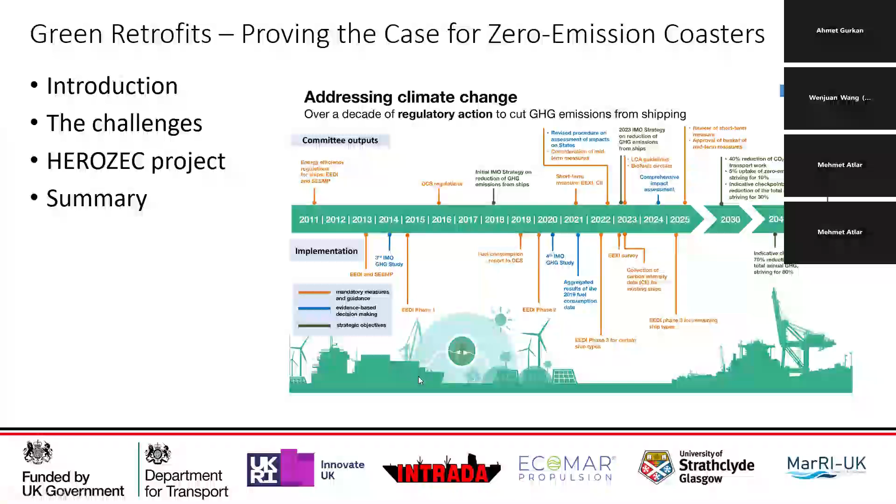So a brief introduction: the HEROZEC project, which we'll be talking about, is there to address a few challenges. This is a project that was conducted under CMDC4 as part of the UK government's UK Shore programme. The project was funded about a year ago by the UK government in order to try and address the challenges, which I'm going to talk about in the next couple of slides. The project is run as a consortium between ourselves, which is Intrada Ships Management, EcoMar Propulsion, the University of Strathclyde, and MarRI-UK.

So the challenges we're trying to address here, the main one is the moving regulatory environment. In the European Short Sea, which is where this is targeted, it's a particular domain of shipping which is actually one of the underappreciated parts of the global commercial shipping fleet. The European Short Sea and the Short Sea in general represents around 10,000 vessels, a hugely populous part of the market, albeit one that seems to be at the lower end in terms of where technology appears, and certainly where general public appreciation of the marketplace is. For context, the total commercial international fleet is around 100,000 vessels, about 106,000 vessels, so you can see that 10,000 vessels represent something like 10% of the entire commercial fleet.

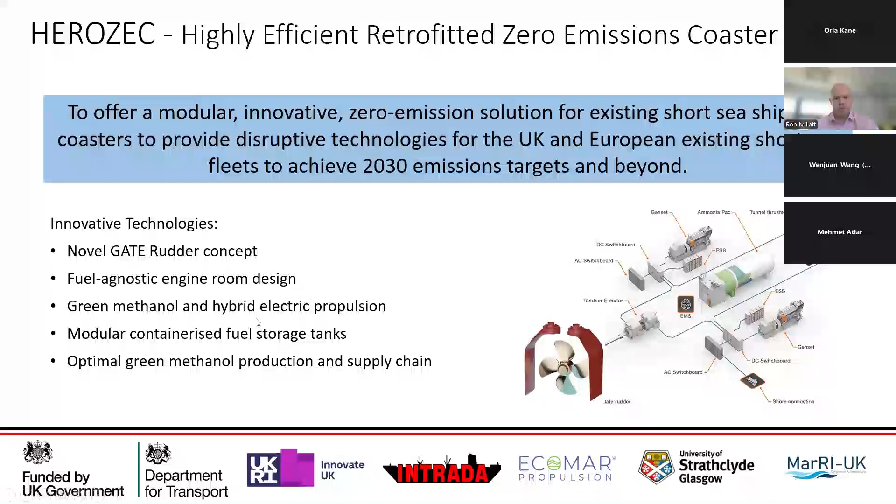On the next slide, you'll see some information about the HEROZEC project, which has got 5 key tenets that can largely be broken down into 2. Eugene from EcoMar Propulsion will be talking about the powertrain element of the project - the powertrain supply chain for the fuel and the fuel storage. He'll introduce himself, followed by Ahmet from the University of Strathclyde, who will talk about the novel gate rudder system and how that fits within the hull efficiency improvements to create a combined package - a potential retrofit package for vessels that an owner could adopt if they wanted to.

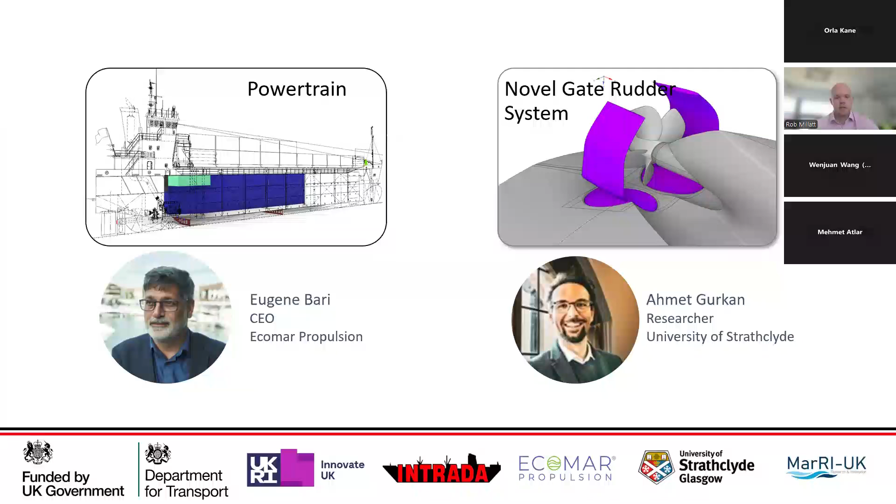So Eugene, are you happy to take over the next slide now, please?

Thanks, Rob. I hope everybody can hear me. I'm actually in a car park at the Ocean Terminal because I'm on a panel in 10 minutes, so unfortunately I have to be a bit quicker than I would have liked to be. But if anybody has any questions specifically for me, please feel free to email me on the email you see on the screen there. So I will speed through these - I know everybody's busy and we've all got stuff to do.

So obviously we'll start with the vessel itself. The principle we were looking at was how we were going to use 2 different kinds of potential fuel at the beginning of the project, and then we wanted to whittle that down so that we had one functional fuel that would meet the duty cycles, do everything that the owners wanted - in which case it's Intrada Ships - and also minimize the cargo losses. So can we go to the next slide, please?

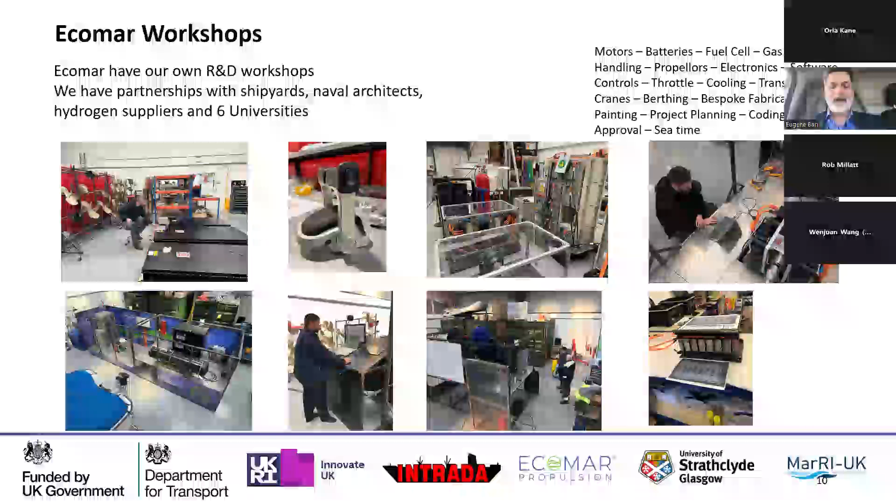As you can probably tell from this, I've done a lot of preparation that I'm not going to be able to use, but we've also done an awful lot of practical delivery of machinery, including battery, hydrogen, and methanol technologies. So next slide, please. So we're not just about designing on paper, we're actually about making these things happen.

Next slide, please, Wenjuan. Again, the statement of value for the entire industry is huge, and it's increasing. I'm sure most of you saw yesterday's projection with the changes to zero emission and lower emission propulsion. So that really feeds into this whole HEROZEC project.

So next slide, please. Yeah, so we looked at the whole project, and we were looking at, first of all, we took hydrogen as a potential, and we took methanol, and pretty soon discounted hydrogen. The energy density isn't appropriate for this kind of vessel, and therefore we ended up with methanol. We didn't investigate ammonia at this stage because the technology is by no means as advanced as it is for the other technologies, and the further you go along that hydrogen combination, it gets more and more complicated and more expensive. So we whittled it down to saying this is going to be a methanol powered ship.

We have the existing motors in there, and then we looked at the conditions of whether it was viable to put an entirely new powertrain in, or whether we should retrofit and modify the existing powertrain. And it came to a conclusion that we had to modify the existing powertrain because the costs of retrofitting such a huge machine was prohibitive.

The second part of it was to then look at the blend, how much methanol against fuel oil that we're going to put in there, and its efficiencies and all these sorts of things, and how it would fit in again with the regulatory environment and also the structure of the ship. And I think the physical structure of the ship is one of the key leading aspects to what we were looking at a later stage.

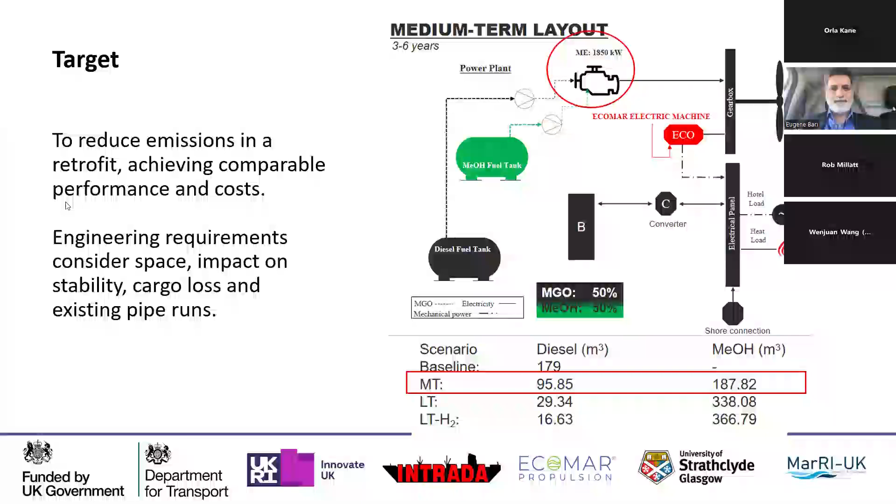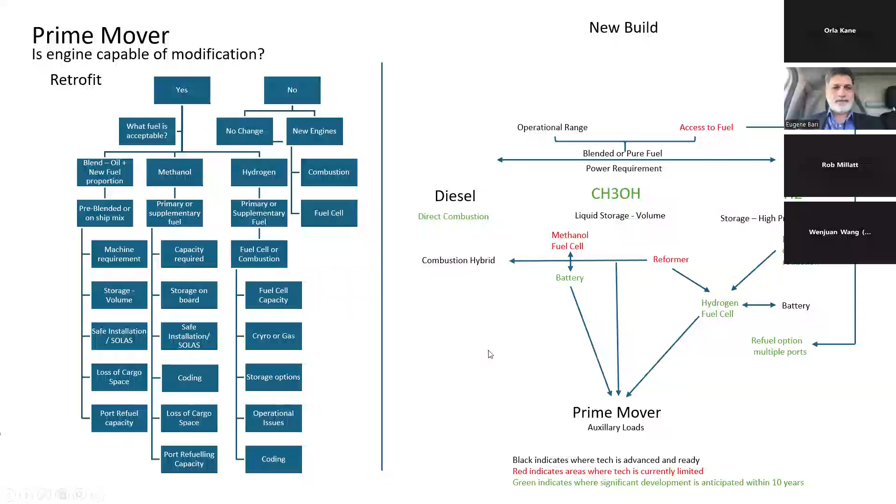We then also looked at, and I should stress, the engine itself. Can you change the engine itself? Can that be modified? In this case, it was the Caterpillar engine, so it was possible. And then we need to look at balance of plant and existing equipment, and then the ship itself. And this is the interesting bit for the naval architects, is how do you get that fuel on board that vessel, given the fact that it takes up more space than your existing fuels.

And so we spent a lot of time investigating not only the regulations that we were looking at, which is IGF code and Lloyd's, but also about how we would change the ship over without it impacting stability, buoyancy, cargo, crew effectiveness, and all these multiple different aspects. And so the game that we played was a very complicated game of Tetris, in effect. And we played with a lot of different aspects, the sloshing aspects of the different fuels, and also cofferdams, where we would place those, whether we should put things on the deck, under the deck, and all these different variables. And we worked our way through it. So if we could go to the next slide, please.

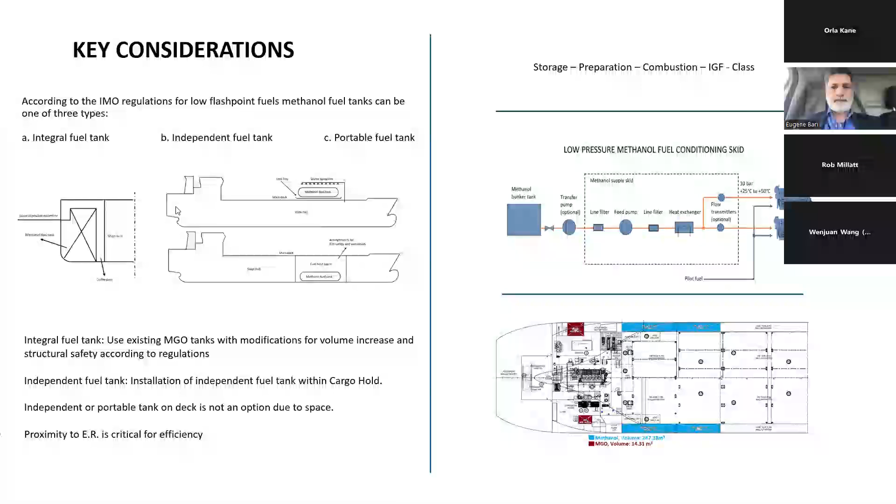So these are the key considerations. We now had a state where we know how much fuel we needed, the volume that needed to be put on board the vessel. We also determined what the fuel preparation areas were going to be. And with a gap analysis against Lloyd's Register, we were aware of where the pipelines needed to be, the vents, and so on and so forth.

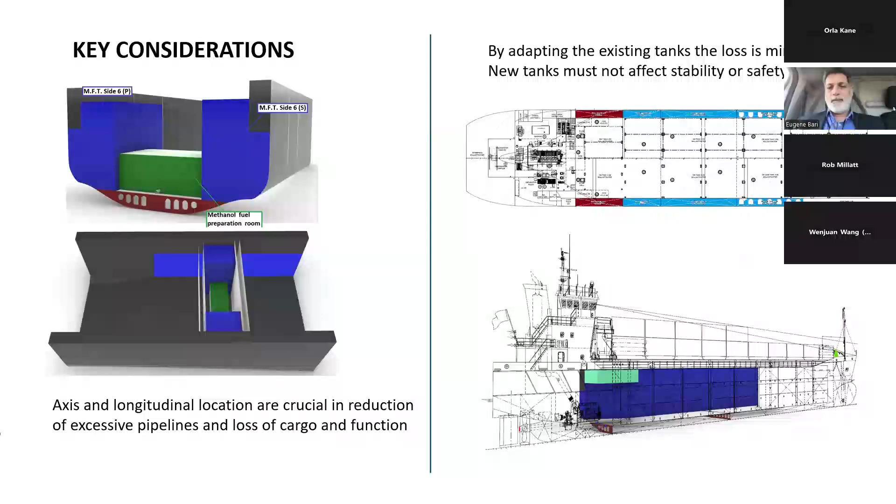And we experimented, as you'll see from these slides that we've flicked through now. There were quite a considerable number of aspects to look at, not only in terms of materials, but in terms of how we were actually physically going to place that in the vessel.

And we came to a conclusion that we could manage the vessel by changing the hatches, welding down one hatch, and placing a nitrogen inertion tank on the top of that hatch, which met all the requirements and only removed 8% of the cargo. So we lost 8% of the cargo as the ship is currently, which was within the boundaries that we've been set.

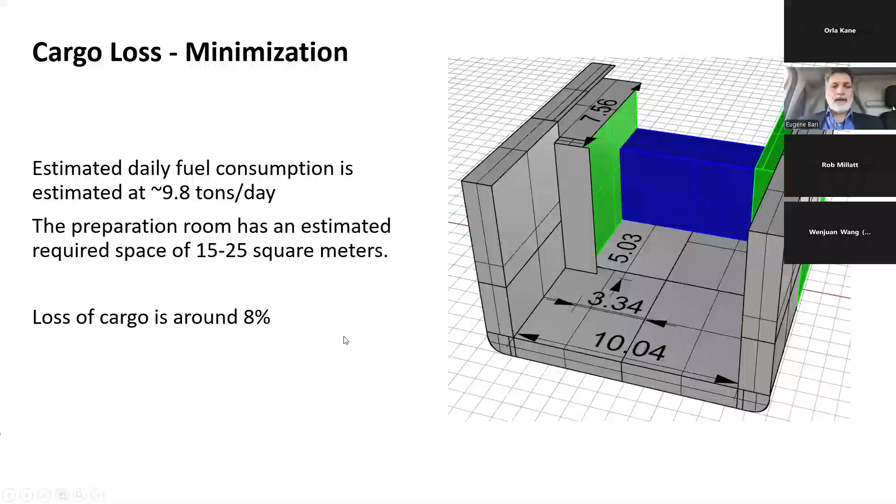So the effect of that is that the cost was minimised and the long-term value was maximised.

So these, again, I will just skip through these a little bit, but these are further safety considerations. So you have to look at IGF codes, you have to look at bunkering, you have to look at how the excess gas or waste is vented and where the pipe runs are going to go.

And this is all based on the existing ship, de-aeration, and so on and so forth. And so what we did was we determined where these optimal choices were, and then took that as the next stage to make our other core decisions, which is an iterative design process that we worked all the way through.

And at every stage, we referred back to the Lloyd's Register IGF code, and we also referred back to the principal who really wanted to know, which in this case was Rob, what is it going to do for my ship?

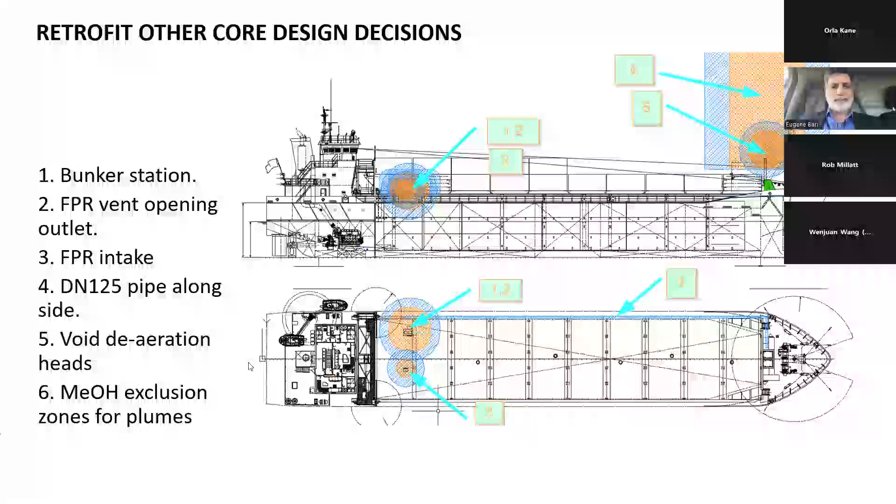So the strategies that we came up with, as I say, we moved the deck hatch, we sealed 50% of the hatch. We mounted a nitrogen tank on, which then creates an inert gas, which will enable us to meet all the safety requirements for the tanks as they deplete. It also allows us to purge those tanks as we go.

And we looked at the orientation of the tanks and their positioning. And what we found was on the vessel, in this case, it had a false bulkhead that we could use. So we moved a lot of these smaller issues around.

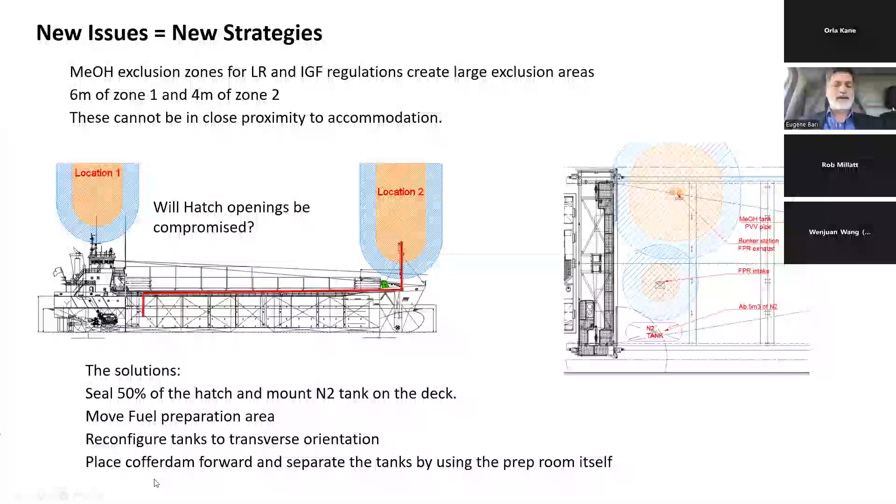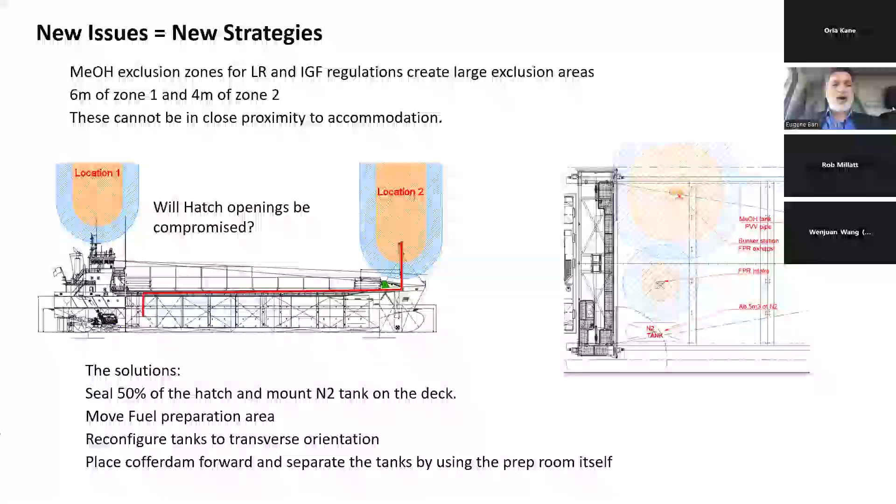And we actually found that the vent location for the mast, there is a possibility to use the existing trunking and run it right along the ship and get it right away. So location 2 ended up being the preferred option. And given the fact that it wasn't under high pressure, that it wasn't any particularly onerous engineering, we considered that to be a much safer option than going anywhere near the wheelhouse.

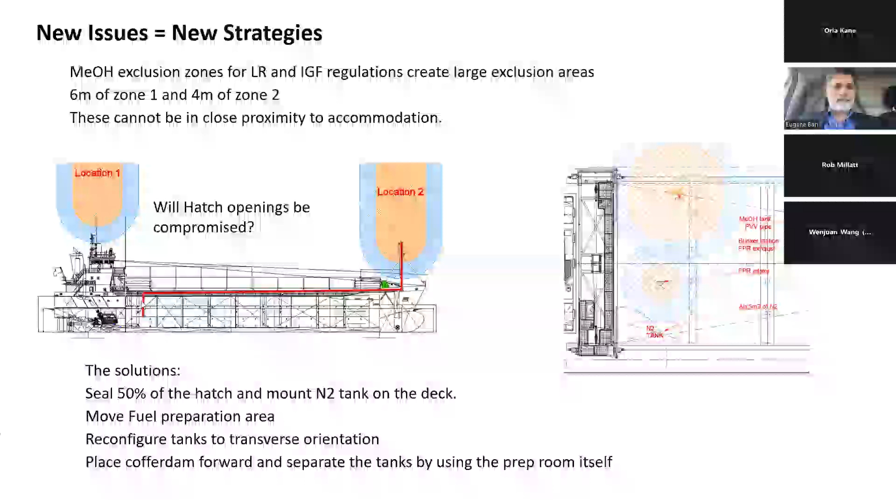And this is our final design. So having gone through multiple iterations, what we found is that by utilising the rules and positioning the fuel preparation room

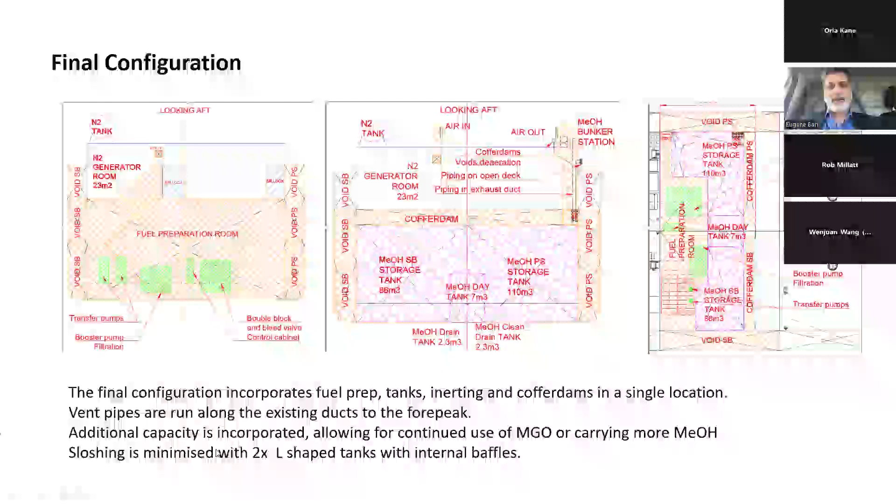and the cofferdams and creating new transverse tanks, which you can see are in an L configuration, we were able to provide the fuel that was required, the storage capacity. We're able to inert that tank, we're able to meet all the IGF codes, and we're also able to maintain the stability of the ship without any adverse impacts.

There will be a new ballast calculation to be done, but actually the stability of the ship's not impacted whatsoever.

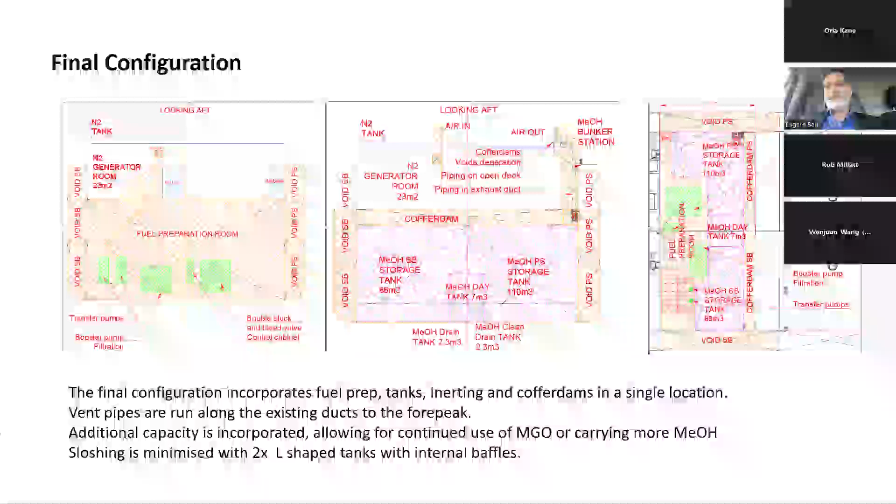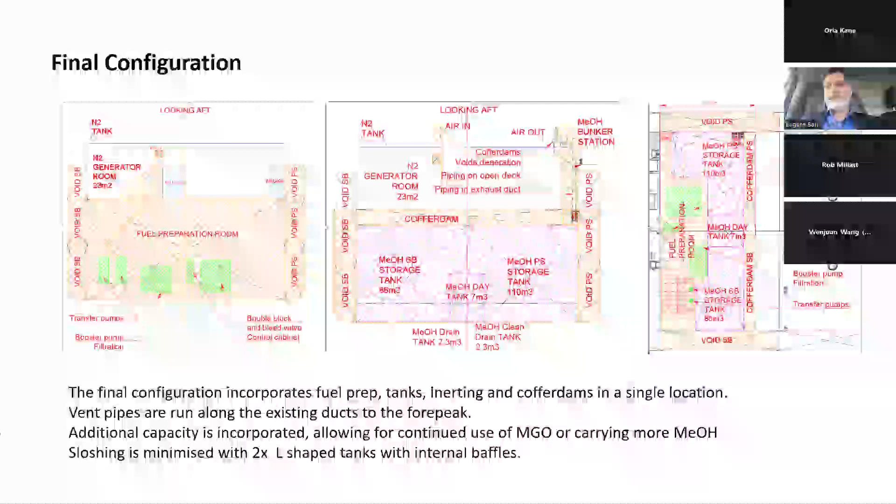So by the time we get to the final configuration, which you see in front of you, it's very, very simply put together, and it has no direct impact on the existing engine room or steering room.

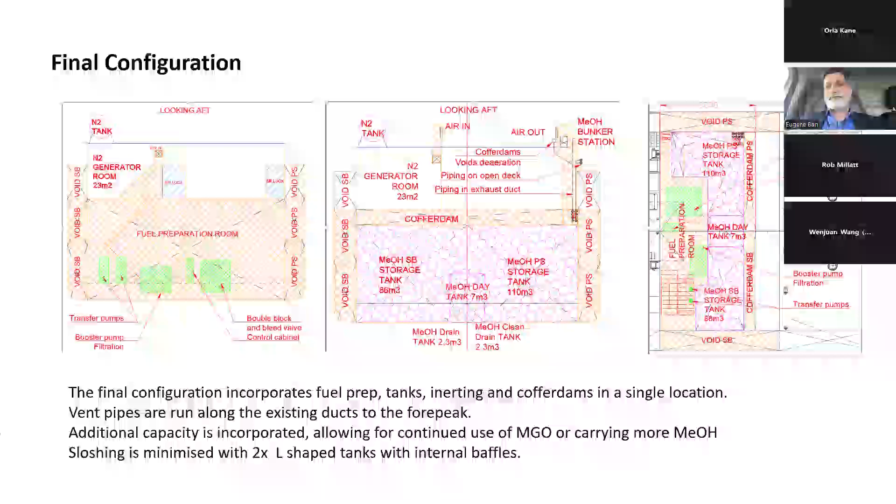Next slide, please. It took us a long time to work these things out. At the transition from existing fuels, the financial side of things, the cost centers we considered as in effect a contract for an Intradaship, we were looking at all these different engine modifications, fuel handling systems, safety systems. These things have to be brought into the design process, and the earlier you bring them in, the better.

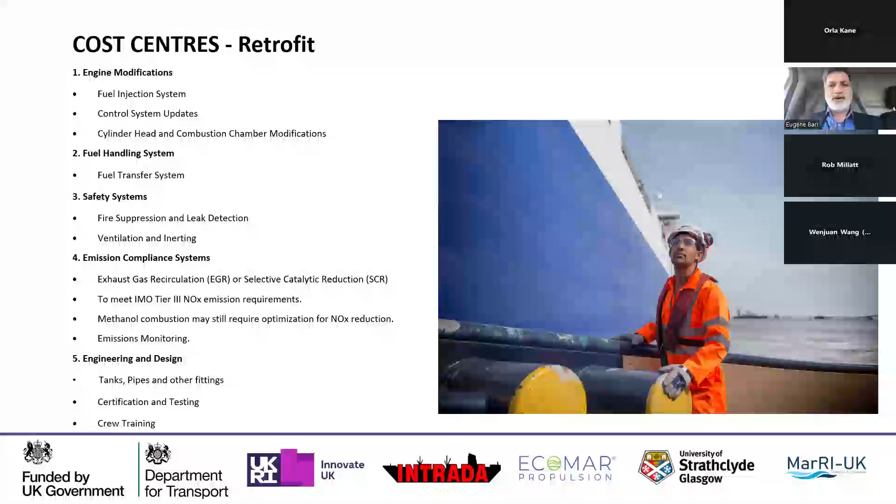I think one of the major issues we discovered was that the Caterpillar engine is proprietary technology. That was one main issue we found very difficult to overcome. If you go to those OEMs and get other shipowners in the future as part of a development project, the supply chain is there. They're working on the fuel supply, and the fuel supply is limited at the moment, but in the short term it will improve.

Sorry, don't know whether it's just me or everyone. So Eugene, we cannot... I think we may be having an issue. Okay, sorry, it's okay, some words we heard. I hope that people will be able to gather the information from some keywords. I don't know if you can hear me at all now, guys. Yeah, now it's okay, are you back on? Sorry, apologies for that everybody, my voice is going and now my internet's going as well.

If we can go to the next slide, I'll sum up very, very quickly. Just to reiterate what I was saying before, the fuel supply is available. It is growing. Methanol is becoming more available. Short to medium term, this is a viable option.

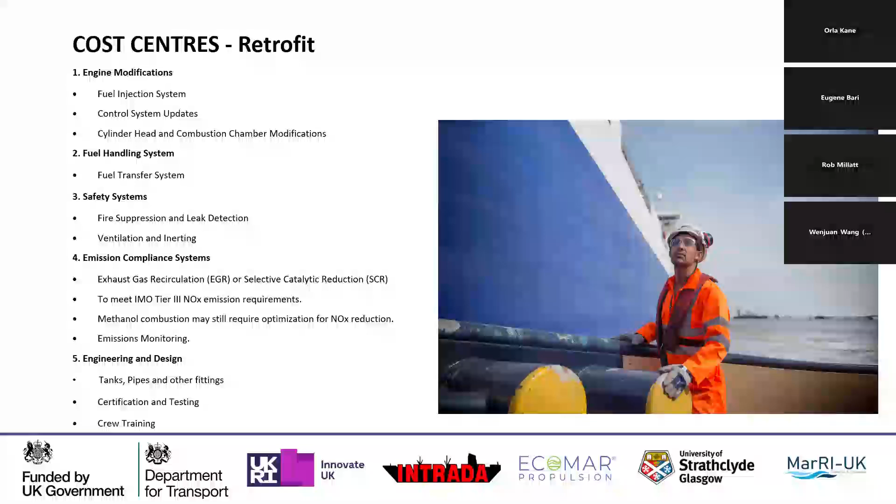So on the next slide, you'll see the costing. Even given the restrictions from Caterpillar, what we've found is that the energy supply and the motor transition is around about 2 to 2.5 million euros. There is finance available now for those of you who are interested in doing this stuff, which reduces the capex massively and transfers it to opex. It is a very viable, possible solution.

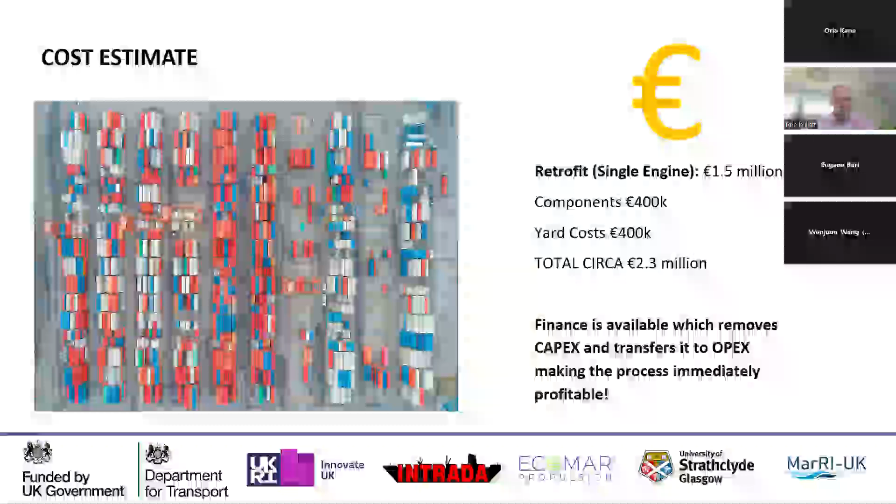And so the risk that Rob was talking about is reducing. I wouldn't say it's minimized, but it's definitely reducing. For us, what we found was the project has been really valuable in not only collating all the regulatory environment, but also the economic and financial stability for our clients, in this case the Intradaship. At that point, I will hand over to Rob and leave you. Thank you, and I apologize in advance for the early termination, but these things happen.

Yeah, thank you very much Eugene, appreciate that. What we'll do, we'll move on to the next slide where Ahmet's going to talk about the gate rudder system and that side of the project. I understand there's a bit of information there, and at the end I'll talk a little about financials and how those numbers are grounded - the 2.3 million euros, the breakdown of those costs, how that fits within the financial risk, how that compares to a new build essentially. So Ahmet, if you're happy to introduce yourself, please take it away.

Hello everybody, can you see my screen right now? Yes, we can see that fine. Good, yeah, good morning everybody. I'm Ahmet Gurkan, a computational fluid dynamics specialist and researcher at the University of Strathclyde.

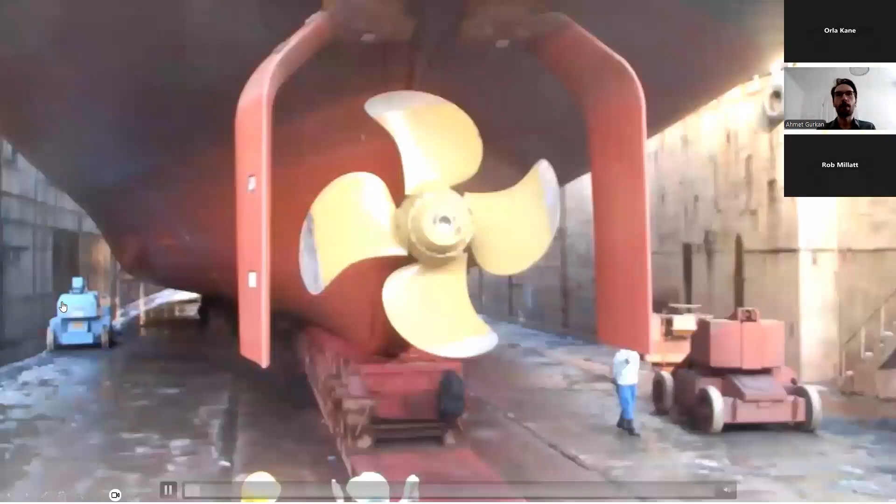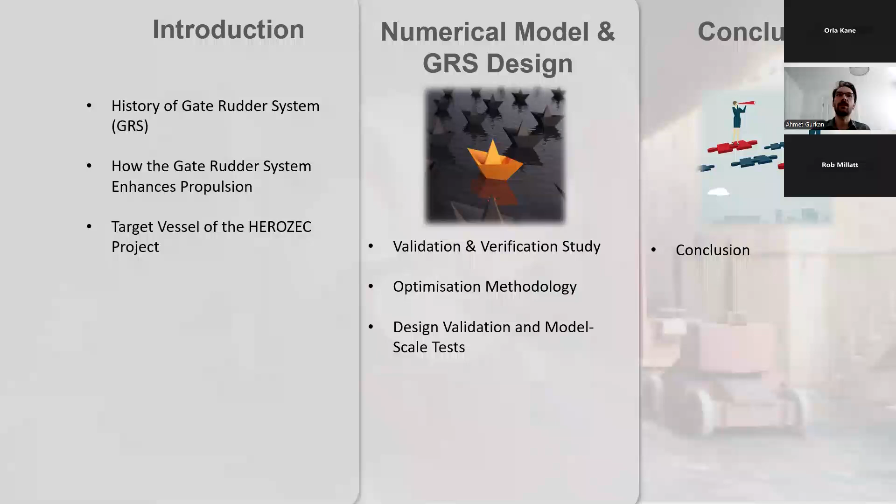Today I will be presenting the design of a gate rudder for a 90-meter container vessel and its impact on powering performance, explored within the HEROZEC project at the University of Strathclyde. I will begin with a brief background on gate rudder technology, including its history and the fundamental principle behind how it enhances propulsion performance. Then I will introduce our target ship, Scott Explorer. For the gate rudder design, we applied an established optimization method utilizing computational fluid dynamics. I will share an overview of the fundamentals along with the validation and verification study, then explain our optimization methodology followed by key results from the design validation, calculation, and model scale test predictions.

The earliest version of the gate rudder system was invented by Mr. Sadatomo Kuribayashi, and it was originally called the frame rudder.

The concept was later tested and refined through a research and development project at the National Maritime Research Institute of Japan, led by Dr. Noriyuki Sasaki. His key innovation was repositioning two rudder blades on either side of the propeller, controlled by a single rudder stock, a design that led to the first associated patent.

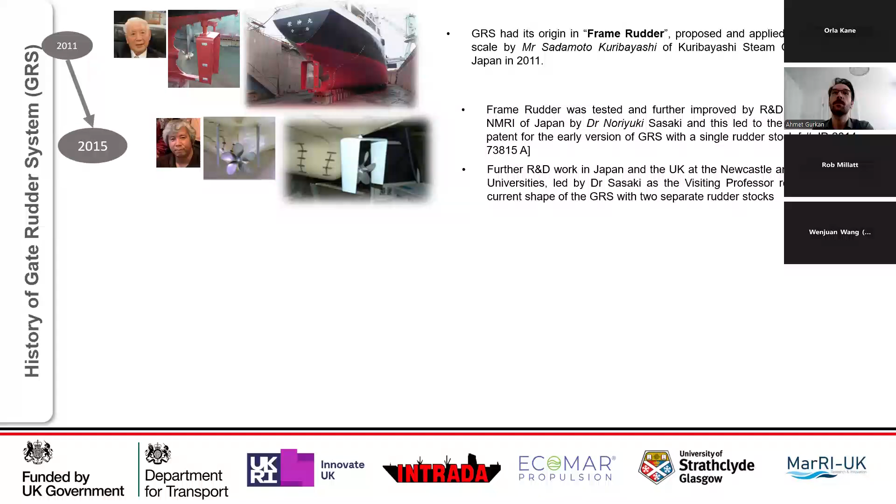Further research and development efforts, contributed by Newcastle University and University of Strathclyde, evolved the system into its modern form, featuring two separate rudder stocks.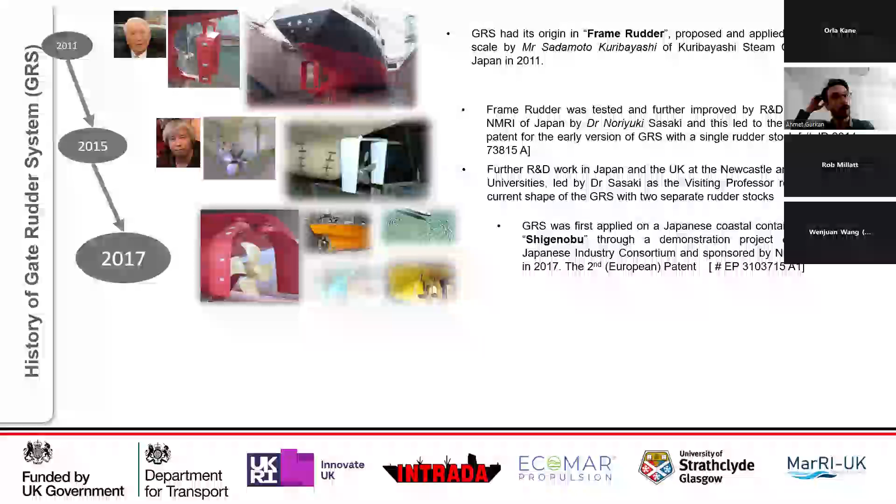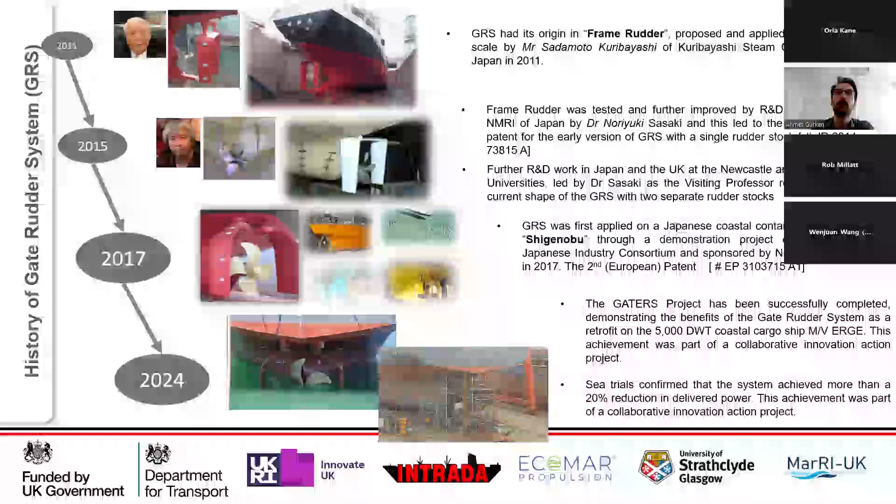Between 2021 and 2024, the Horizon 2020 GATERS project, led by University of Strathclyde in collaboration with 18 companies across 7 countries, aimed to demonstrate the benefit of the gate rudder system as a retrofit on the 5,000 deadweight ton coastal cargo vessel MV Erge.

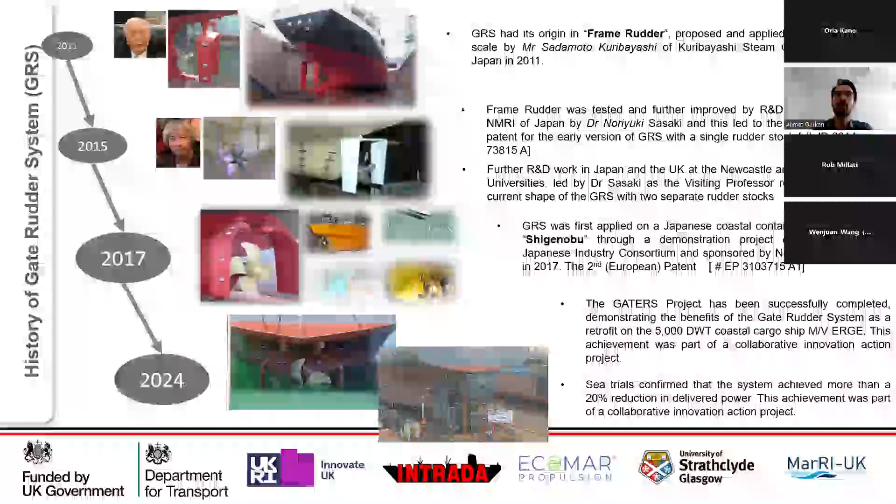Sea trials and voyage data confirm that the gate rudder system achieved more than a 20% reduction in delivered power, highlighting its efficiency and potential in real-world application.

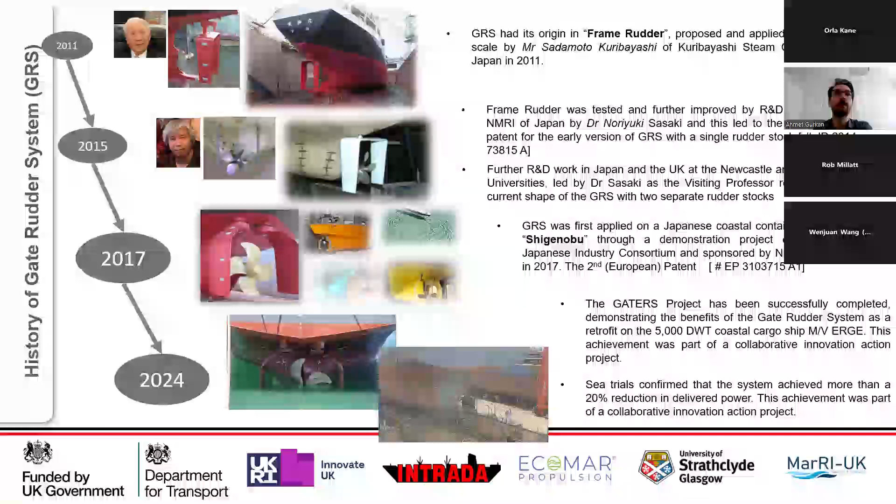In this slide, I will explain the fundamental principle behind how the gate rudder system improves propulsion efficiency. For a conventional rudder system, a moving ship and its rudder experience resistance due to their motion through the water. When the propeller operates at the stern, it interacts with both hull and rudder, causing additional resistance due to accelerated flow of water. This phenomenon, known as thrust deduction, typically accounts for 15 to 25% of hull resistance, and in some cases even more.

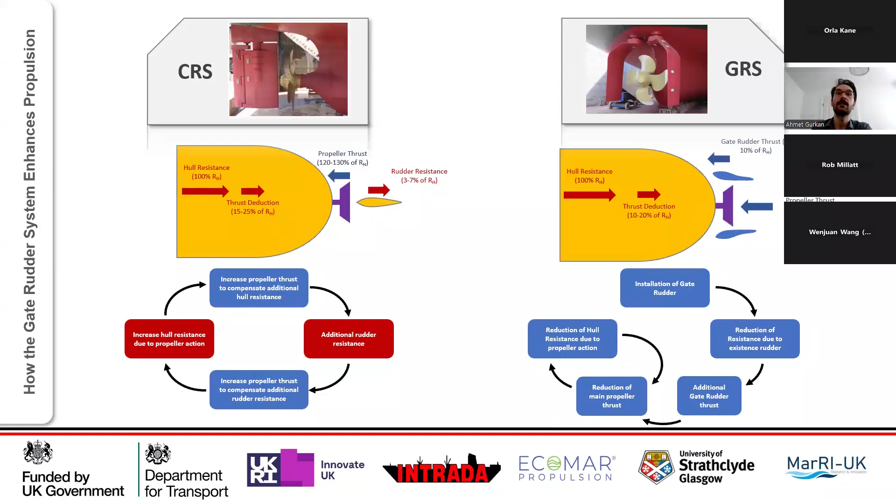For the gate rudder system, unlike conventional rudder, the gate rudder is positioned on either side of the propeller, rather than directly behind it. This relocation reduces total resistance caused by the rudder. Additionally, the gate rudder generates a positive thrust force, meaning it contributes to total thrust force, including the propeller.

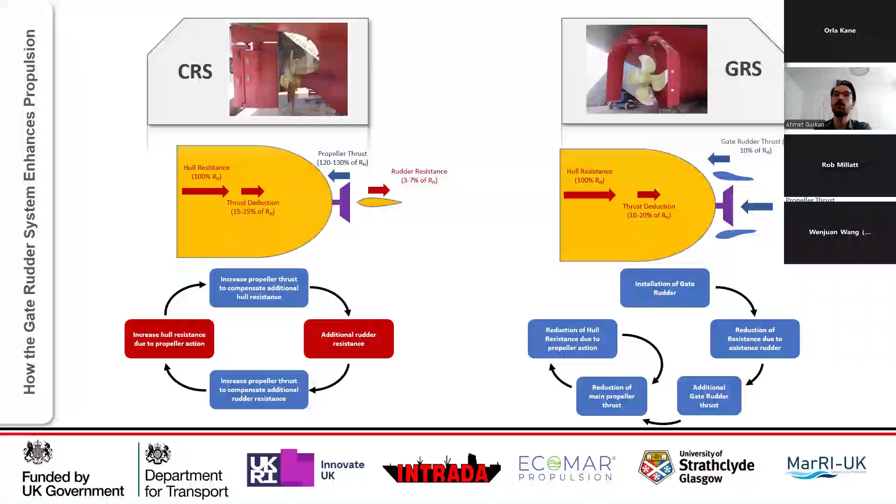Furthermore, rudder blades create a high pressure zone, which interacts with the hull, producing an additional force. We call it pressure recovery force. As a result, the propeller requires less thrust, leading to less water acceleration and reducing the level of propeller-hull interaction. This combination of reduced resistance, added thrust, and improved pressure recovery is what makes the gate rudder system significantly more efficient than the conventional rudder system.

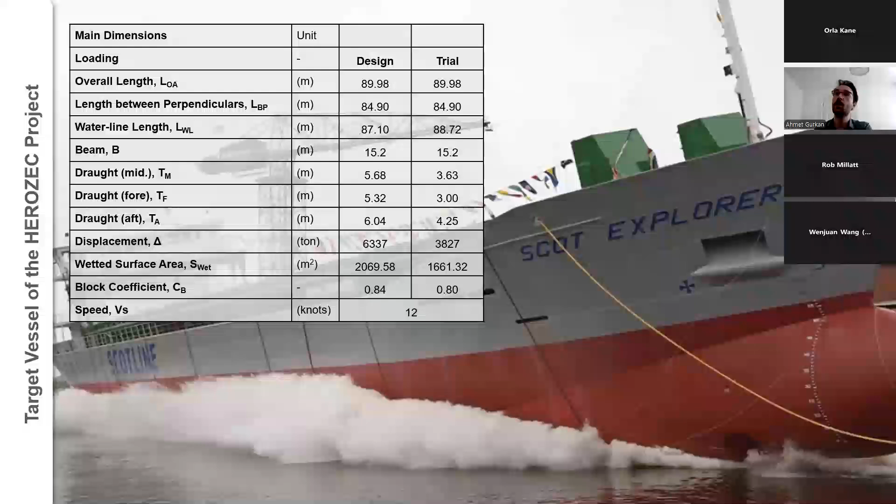Our target vessel is Scot Explorer, a 90-meter long container ship capable of reaching speeds up to 13 knots. In this design study, our primary focus was on the design condition, where the vessel operates at 12 knots with a mean draft of 5.68 meters. However, we also considered trial load condition as part of the project. The Scot Explorer is equipped with a ducted propeller system featuring a 2.3 meter diameter propeller.

For the gate rudder design and power prediction, we utilized computational fluid dynamics. In this slide, here are key aspects of our numerical model.

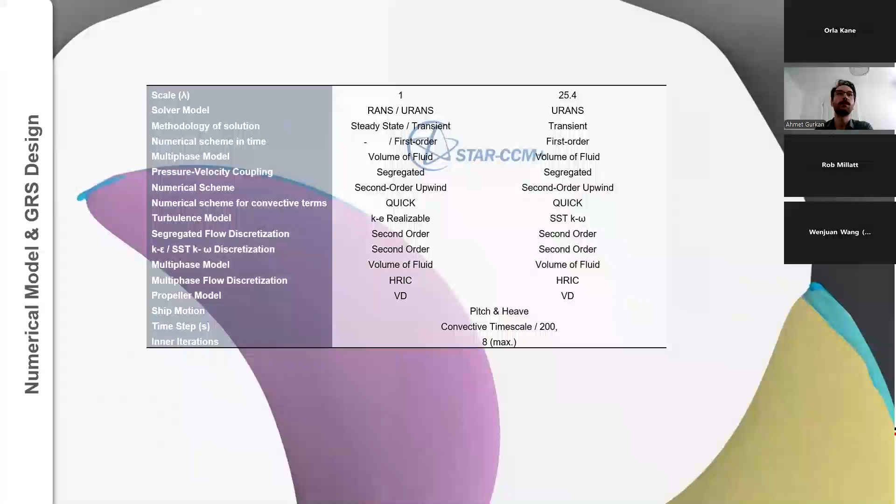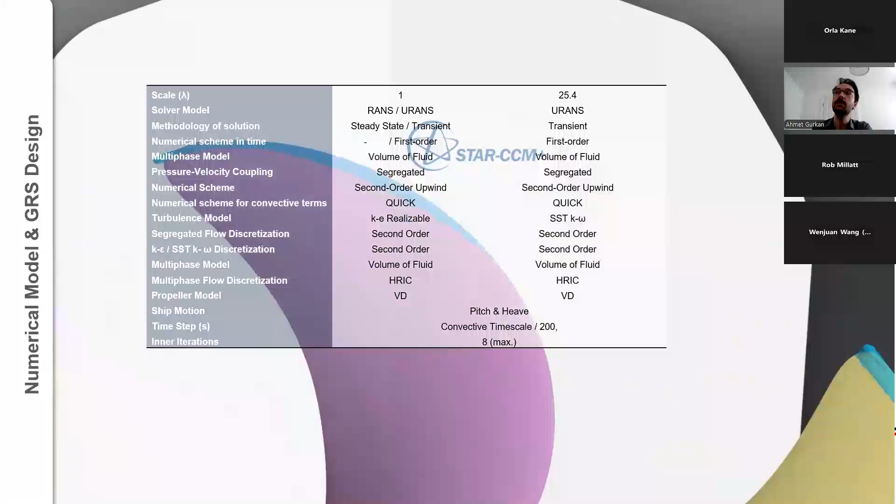We used Star-CCM, a viscous-based CFD solver. Resistance and propulsion calculations were conducted using unsteady Reynolds model for both model scale and full scale simulations. Open water calculations and optimization were performed using steady-state Reynolds model. The volume of fluid model was applied to account for free surface interaction.

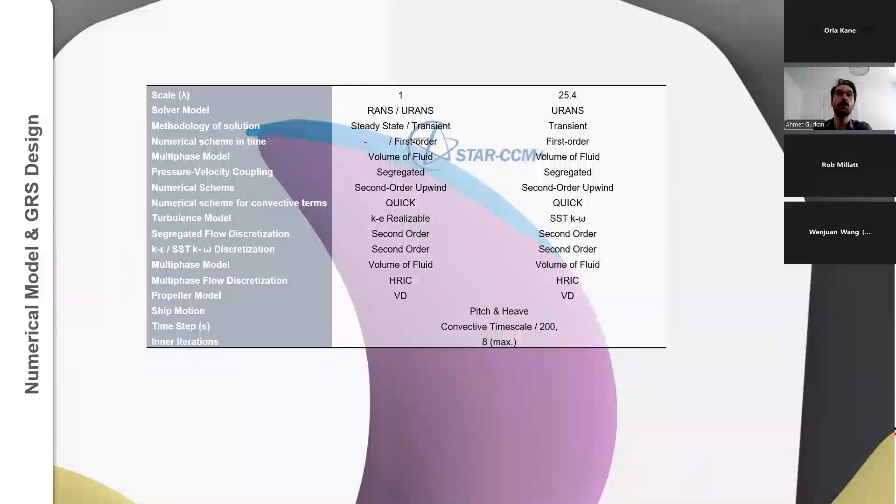Pressure and velocity coupling were solved using a segregated approach. Depending on the simulation scale, we used K-epsilon realizable and SST K-omega turbulence models. All numerical discretizations were implemented using high order schemes for accuracy. Ship motion was considered in 2 degrees of freedom.

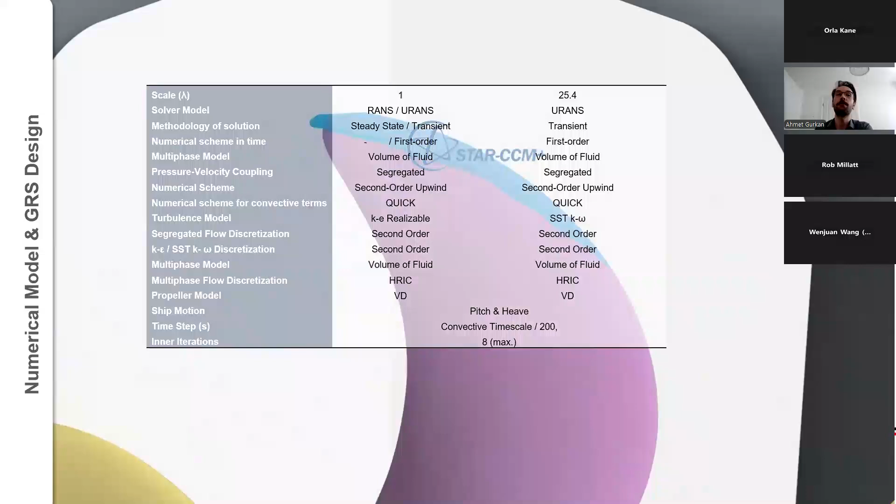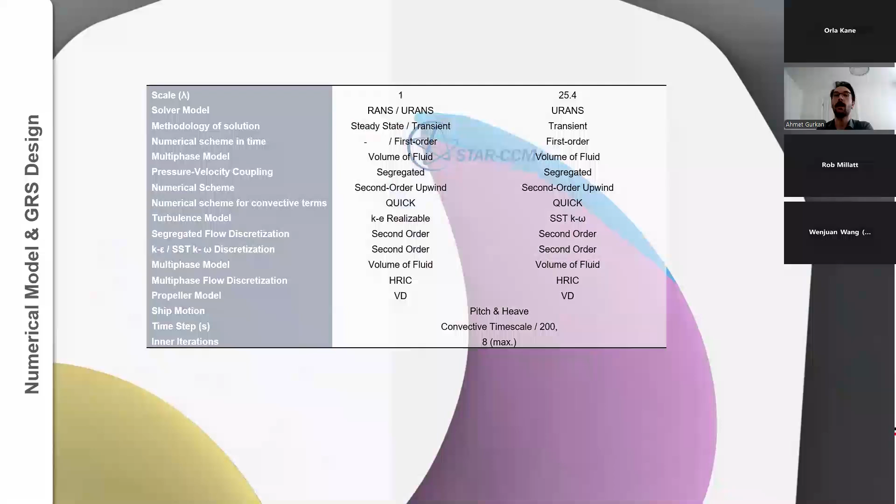These are heave and pitch motions. Finally, propulsion calculations were performed using a modified virtual disk approach due to project workload and time constraints. This setup allows us to achieve reliable and efficient CFD prediction for the project.

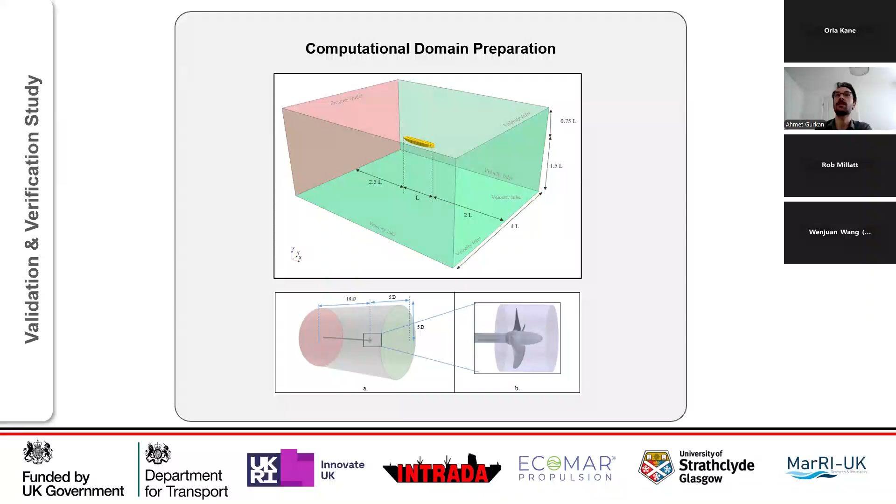Mesh generation, or in other words, geometrical discretization, involves dividing the computational domain into small cells to create a solution matrix. For this study, we used Star-CCM's trimmer mesh method. To ensure accurate flow resolution, we applied local refinement in high gradient flow regions, like around the hull, appendages, and the propeller, especially for the open water calculations.

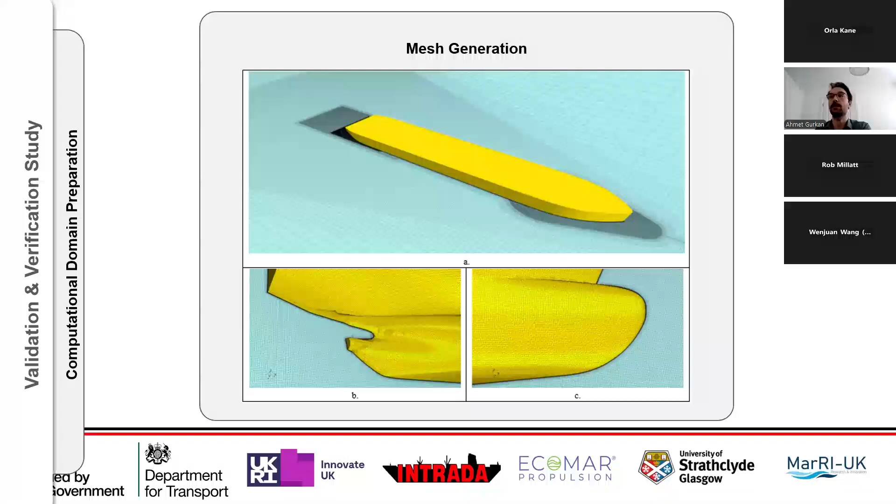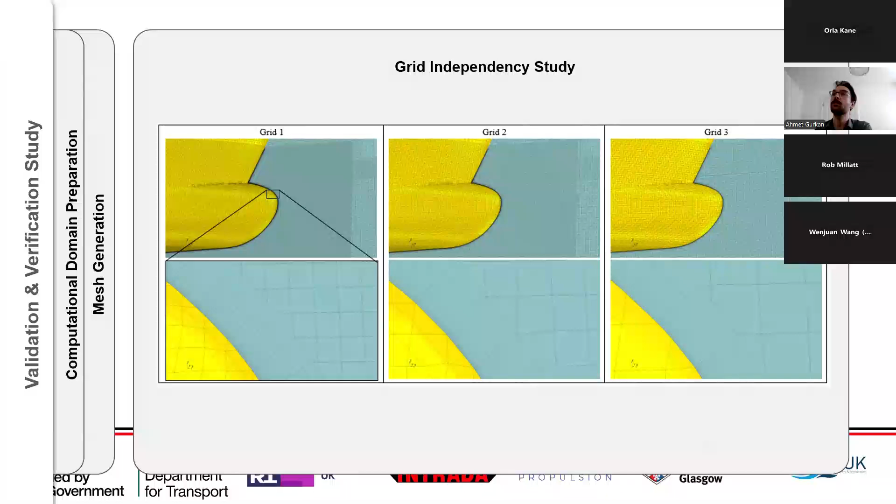In this slide, I will give some detail on verification results of our numerical simulations. To ensure reliability of the CFD predictions, we conducted a verification study using 3 different mesh structures with varying mesh density for each associated calculation. The grid independency was evaluated using the Richardson extrapolation method, as recommended by the ITTC.

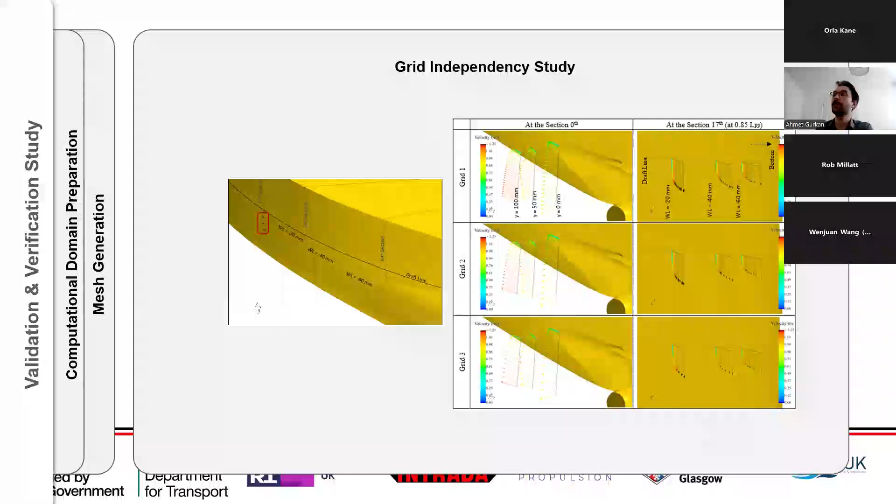In addition to fundamental hydrodynamic outputs, we also verified that the flow and pressure profiles near the hull surface were mesh independent. The verification studies were performed for both model and full scale calculations, as well as the open water simulations.

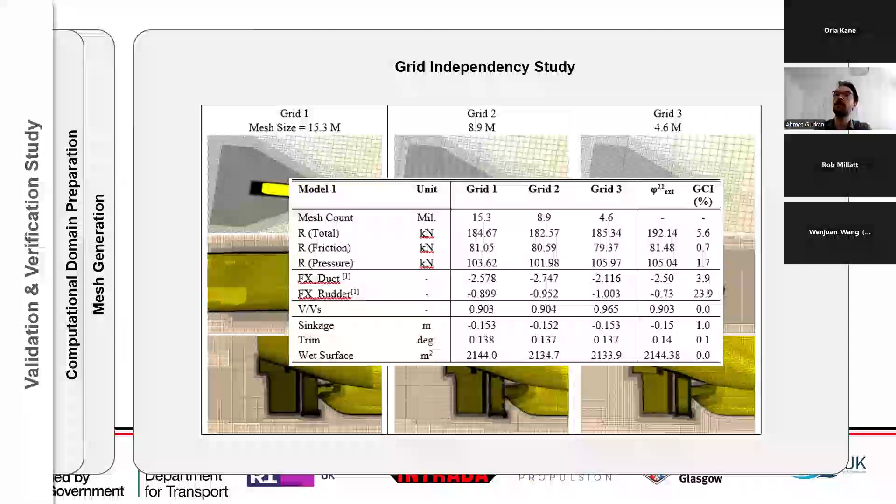These validation results, the calculated grid convergence index values, confirmed that the selected mesh structures provide grid independent results, ensuring the accuracy of the numerical approach. These verification steps were crucial in validating numerical consistency and reliability for our CFD simulations.

In addition to the verification study, validation investigations were carried out for several key aspects. For the propeller open water calculations, the results show a deviation within 5% when compared to both measured and extrapolated data, confirming the accuracy of the calculations.

For the model scale resistance prediction, the discrepancy between prediction and observed values is consistently within 5% across the range of model speeds tested. For the full scale prediction, power predictions were in excellent agreement with the power measured during the sea trial, showing a deviation of just 1.6%.

These validation results demonstrate that the accuracy of our numerical model is within the acceptable region, validating its reliability for these particular applications.

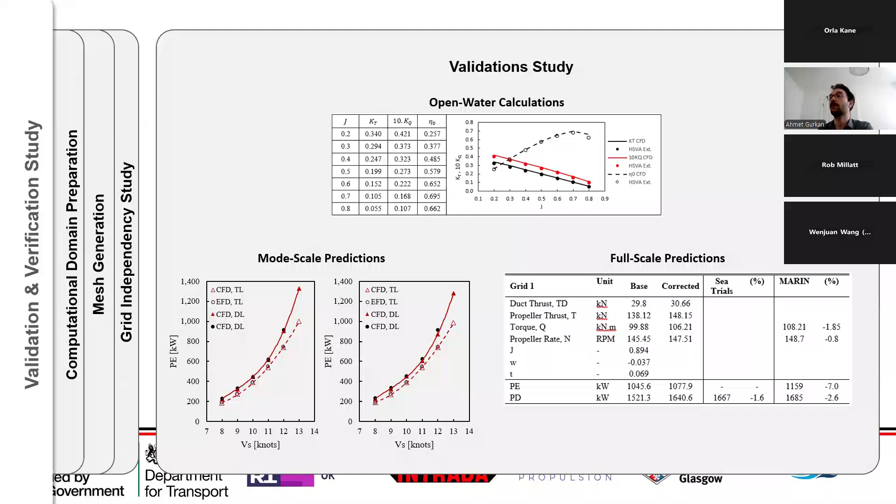The optimization study was conducted following the established method developed in the GATERS project. For more in-depth scientific detail, please refer to the published paper displayed on the screen below.

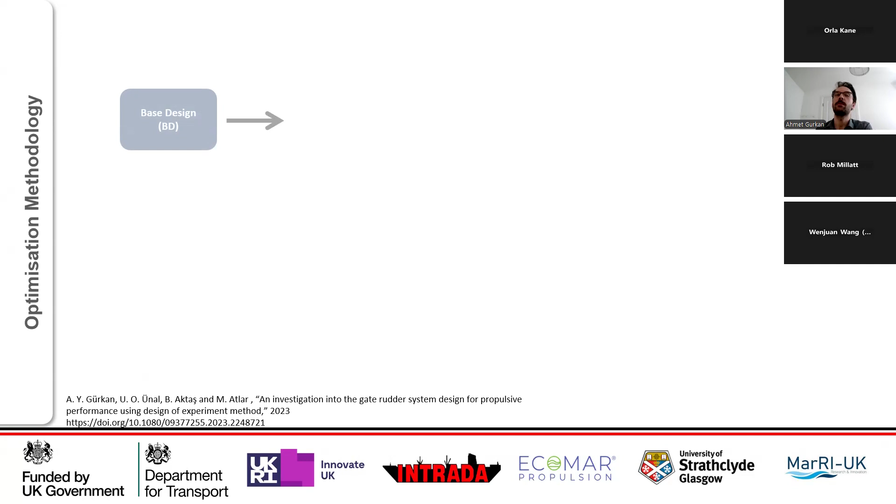In this optimization process, the CAD preparation and optimization were managed using CAESES software, while CFD calculations were performed using Star-CCM+, as I mentioned before. A key contribution of this work is the integration of MATLAB software for propeller selection for each newly created design.

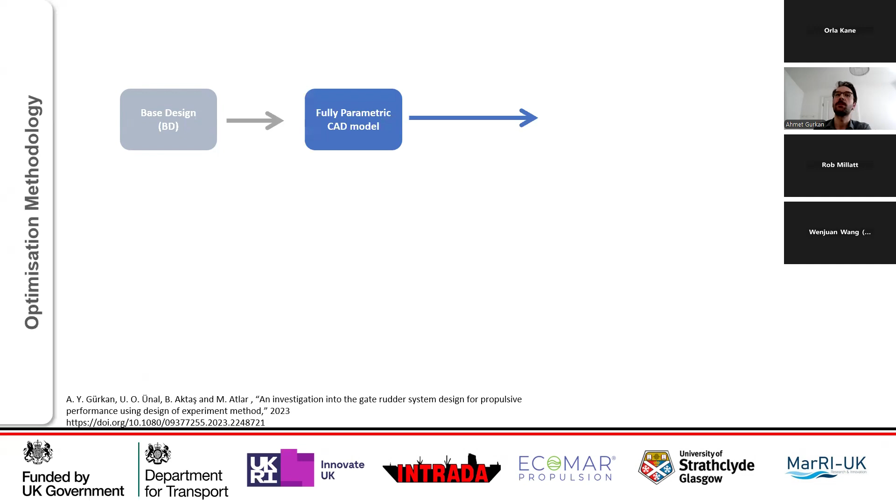The methodology is illustrated in the flowchart, and I will describe each stage in detail. At the first stage, preparation, the initial model and gate rudder design were imported into the optimization model. In the second stage, a fully parametric gate rudder design was modified and fitted to meet the specification of the target ship. That is the CAD part, and now I'll describe the optimization part.

The gate rudder design was created based on selected design variables, ensuring compliance with the geometrical constraints. At the fourth stage, CFD calculations were executed for the new design, and propulsion variables along with rudder forces were exported. For the fifth stage, the propeller...

...propeller selection adapted based on the CFD results. At the sixth stage, additional calculations were performed with the newly selected propeller, and propulsion results along with rudder forces were extrapolated. That is the full cycle of one design creation.

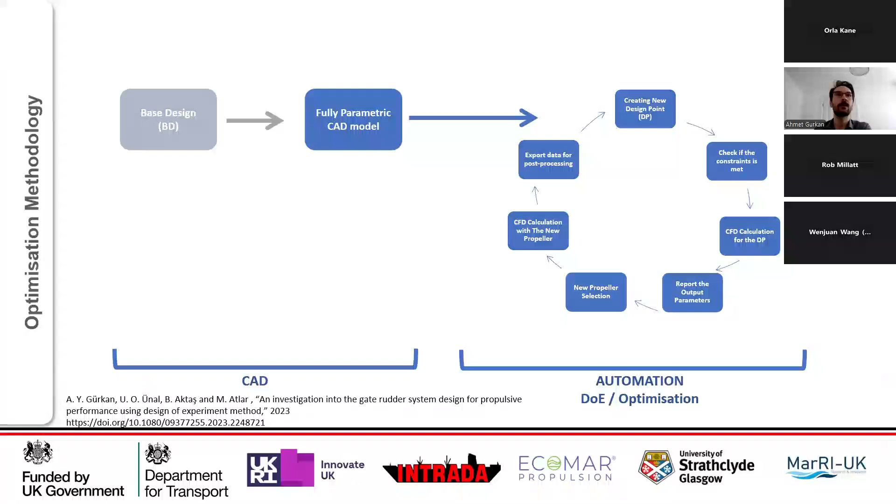That is the methodology that we followed within the CAESES software.

Based on previous experience, three of the most sensitive design variables were incorporated into the optimization study under the HERO-TSEC project. These are blade rudder angle, rudder tip bending, as you can see in the middle image here, and rudder profile camber. These three design variables were the focused design variables in the optimization.

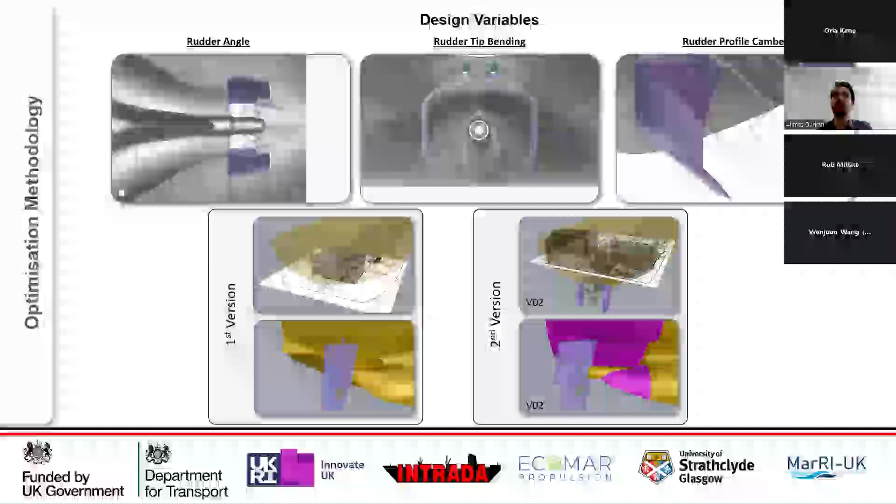Two parametric gate rudder models were developed, each based on different rudder configurations. Version 1 used the existing hull form with duct removal; there was no manipulation at the stern or shaft region of the ship. Version 2 involved a modification to the stern form to accommodate the positioning of the rudder blades, as shown in the image. Each configuration underwent a separate optimization process.

A detailed design of experiment study was initially conducted for the first version of the gate rudder system. For the second version, which involved a significant change to the hull stern form, a gradient-based optimization approach was employed, utilizing insight from the first DOE study.

From the parametric investigation, we focused on propeller thrust and delivered power reduction as the key output parameters. During the parametric study, we were able to monitor the correlation between the selected design variables and output parameters. The DOE study revealed that the most sensitive design variable, as expected, was the rudder angle among the considered variables.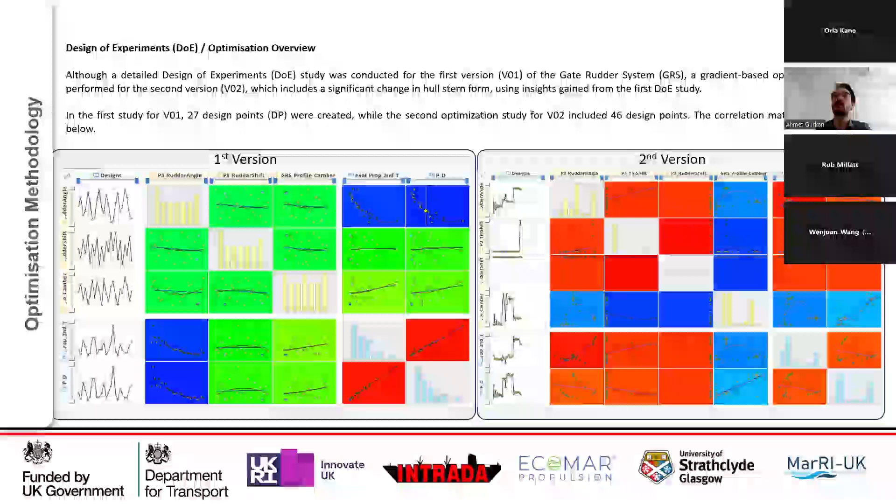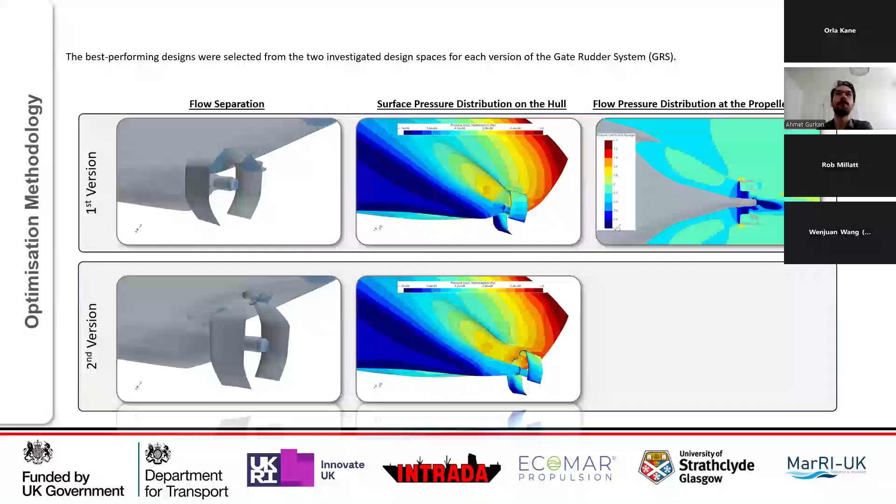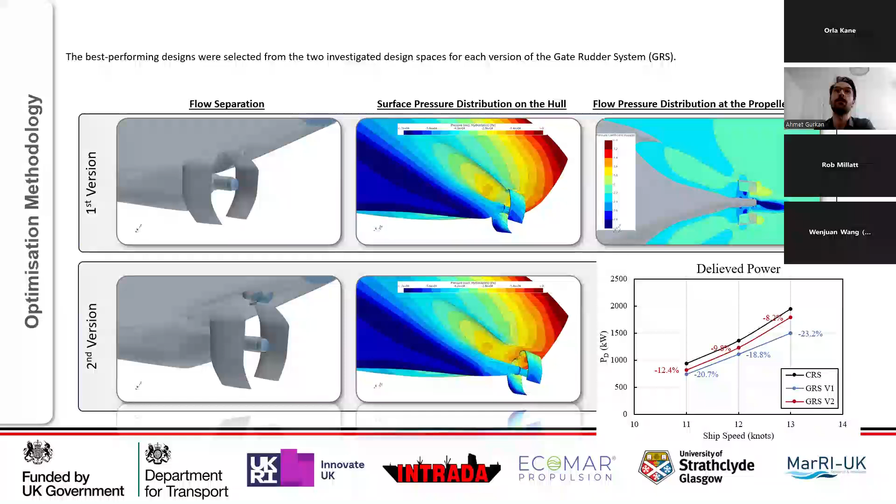Considering the overall results and various flow characteristics, the best performing design candidates were selected from each parametric investigation. The first version showed significantly higher overall performance compared to the second version. As a result, it was decided to proceed with more detailed steps, including full-scale calculation and model testing, using the selected design from the first version.

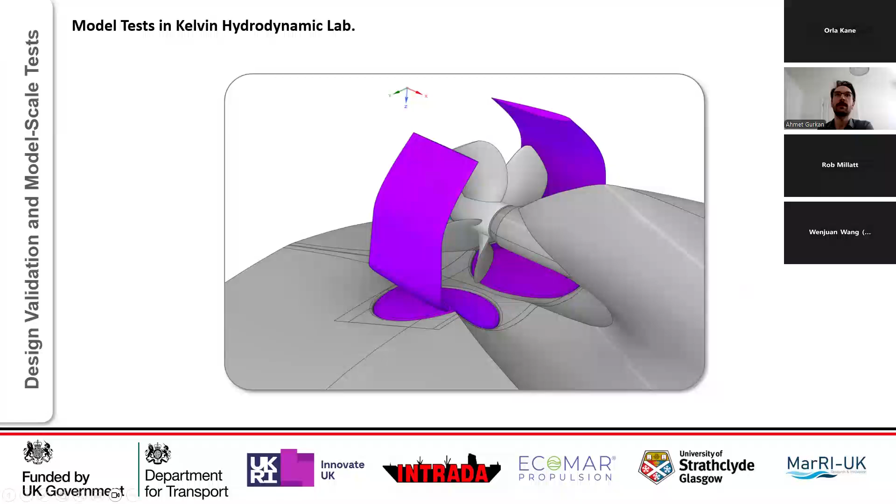This design was also considered the more practical choice, as it requires only minor modification to the vessel stern. The stern form design was slightly updated to accommodate the gate rudder blades and its required motion. For the test campaign, a modular stern form was prepared, allowing for accommodation of both conventional and gate rudder systems.

You are seeing the different rudder systems and their orientation with the model test. Associated propellers for both systems were also manufactured, as you can see in the image.

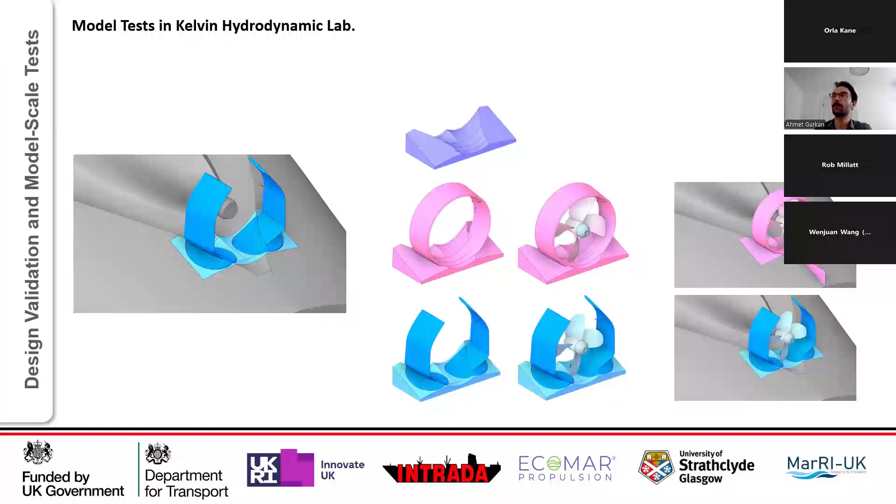The model tests were conducted at the Kelvin Hydrodynamic Lab laboratory. The bare hull and appended hull for both rudder systems were tested under trial and design load conditions, covering model speed equivalent to 8 to 13 knots.

The propulsion tests were specifically conducted for appended hulls, with model speed range from 10 to 12 knots ship speed.

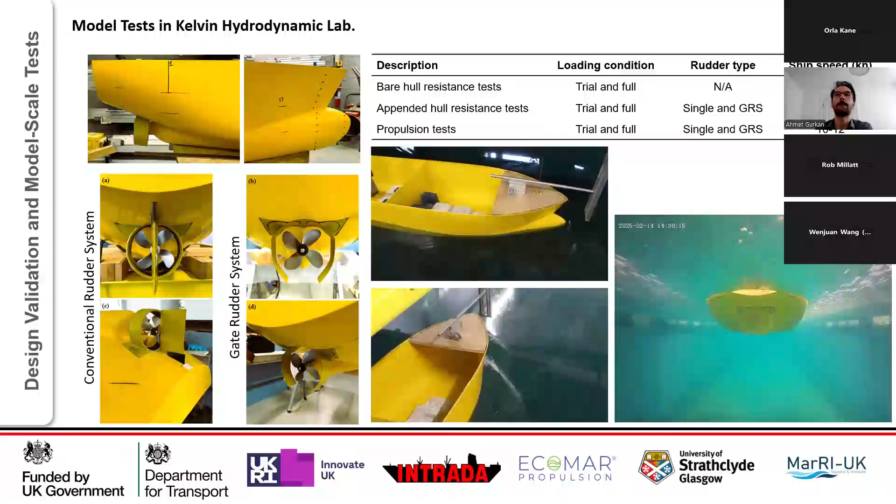Similar to the physical test, model scale CFD calculations were performed to validate the results. The effective power prediction from both EFD and CFD methods match within a maximum difference of 2%.

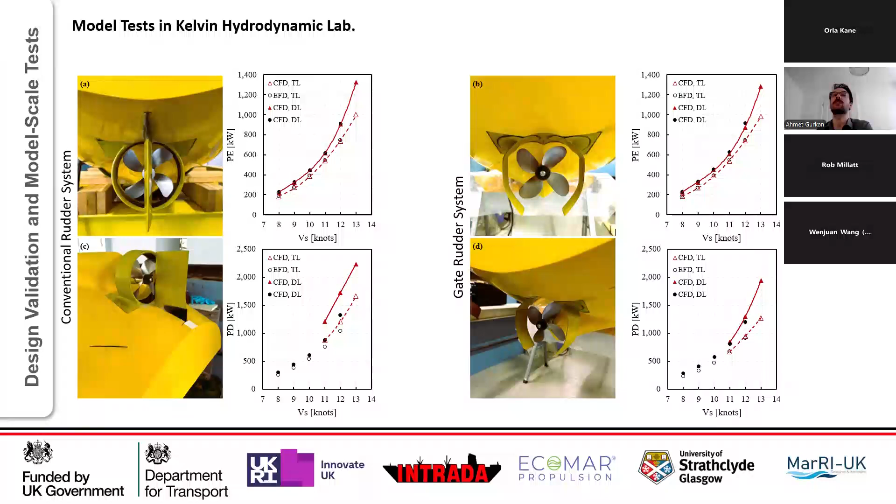However, while the CFD calculations for gate rudder propulsion performance aligned closely with the EFD predictions, especially under trial load condition, there are significant differences between the EFD and CFD predictions for the conventional rudder system's delivered power. That is one important point I should highlight here.

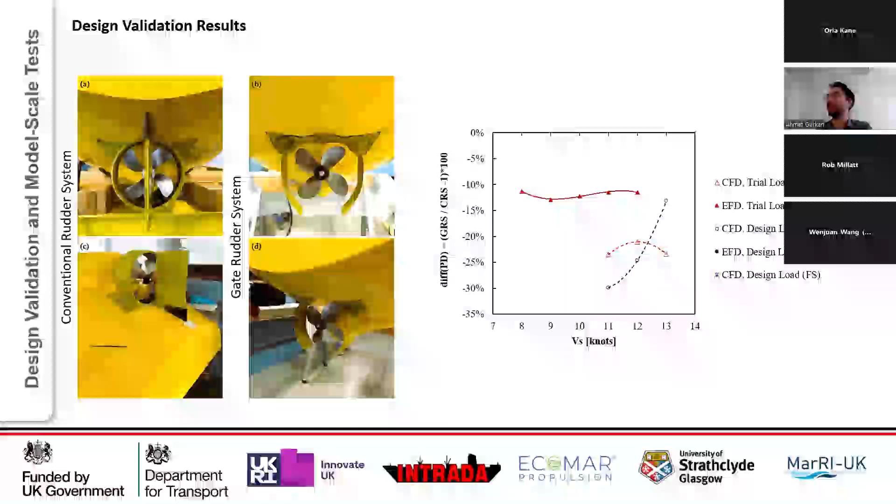A clear picture emerges when comparing the impact of the gate rudder on delivered power, especially when compared with the conventional rudder system. This graph illustrates the power reduction prediction from different methods associated with various loading conditions: CFD trial load condition difference between gate rudder and conventional rudder, EFD trial load condition performance difference between GRS and CRS, CFD design load prediction differences, and EFD design load predictions.

In all cases, the gate rudder demonstrates enhanced energy efficiency. The full-scale CFD calculations align with the model-scale CFD predictions at certain ship speeds. The purple represents the full-scale calculations, not extrapolations, and it matches with the CFD predictions at some point.

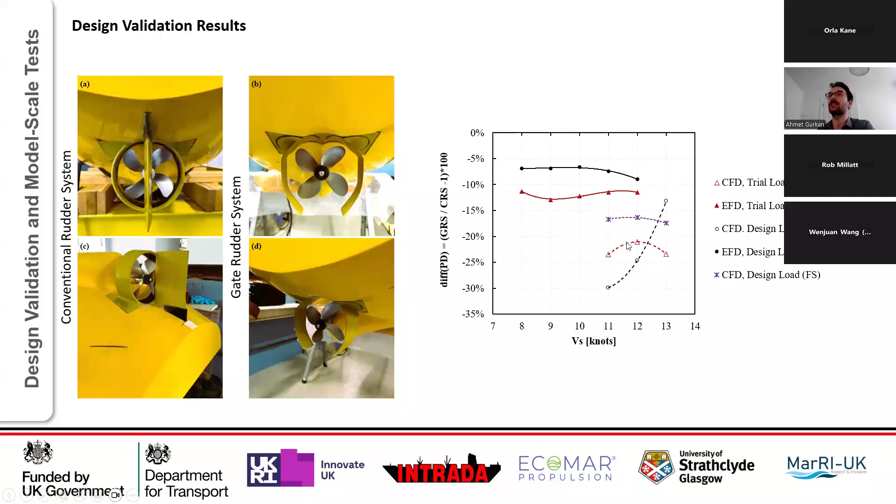Okay, I'm going to go to my last page. Under trial load condition, the EFD predictions show that the delivered power for the gate rudder configuration is between 4.6 to 12.9% lower than a single rudder behind a duct propeller. Computational fluid dynamics predicts an even greater reduction, around 22%. Under design load condition, EFD predicts the PD between 2.6 to 9% lower for the gate rudder configuration.

CFD estimates a reduction between 13 to 30%. The full-scale CFD calculations for design load conditions show there is a 17% reduction on average in delivered power with the GRS configuration.

Based on our experience, sea trials suggest that GRS configuration achieves an additional 10 to 15% reduction in delivered power beyond predicted values, because of the real environment. Therefore, even in the worst case scenario, the gate rudder configuration is expected to improve energy efficiency by approximately 15 to 20% reduction compared to conventional rudder propulsion systems.

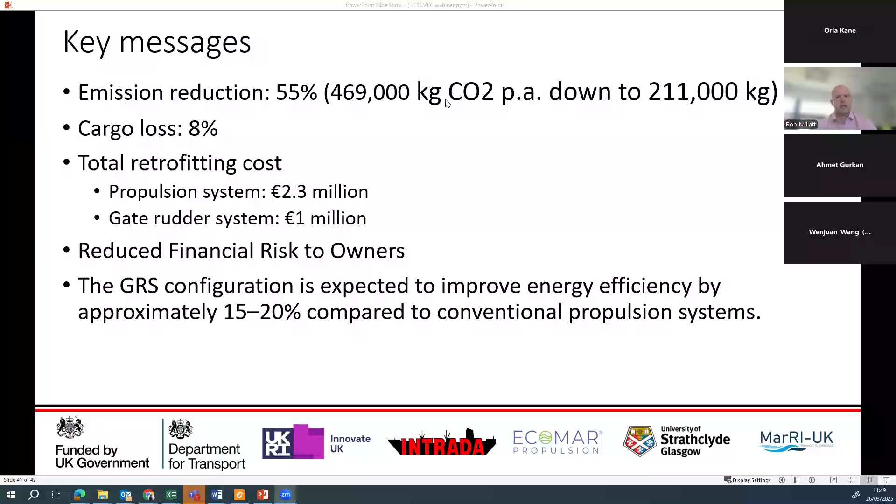As I just mentioned, we believe there is a need for green retrofits. The idea that vessels will be replaced with an all-singing, all-dancing version of the latest technology, we don't see as feasible or realistic. We believe we've come up with something that, albeit short of demonstration at this point, is a viable option for owners to look at as a retrofittable package where they can keep up with the new emissions regulations. We've looked at various technology options and narrowed this down. As Eugene spoke about, we started with quite a broad scope, and methanol wasn't a predetermined fuel.

It was something that we narrowed down by looking at an entire spectrum of different options that are currently available.

In terms of economic viability, we've put together a business case showing potential for savings here, particularly when your baseline may be replacement. We're still working on the OPEX against a current vessel, but we know the OPEX won't necessarily be more favourable than the status quo, though that doesn't include the moving part of emission regulations, which we'll summarise at the end of this project.

We spoke at the start about the regulatory and market drivers. We know there's a moving bar, and unfortunately that means owners have to consider OPEX against what will be happening in 27, 28, 29, 2030, not against what's happening today. It's fine saying we've got lower OPEX today, until you hit the cliff edge where your vessel may not trade at all. There'll become a point where that expires and something has to be done.

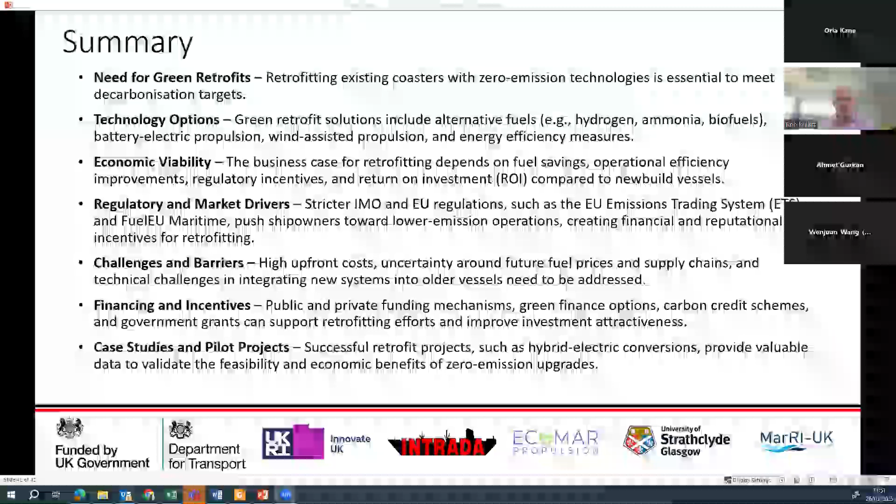Obviously, with challenges and barriers to this project, there are high upfront costs as opposed to status quo, a higher capex, and a number of uncertainties. So we've put a lot of modelling into the variables in this situation, not considering them to be constant at today's prices, such as availability of fuel and the price of that fuel, we've had to consider that moving bar. We've also not considered any financing or incentives here, so we've only really looked at this as an owner spending money on their own account rather than any sort of incentivization from the government.

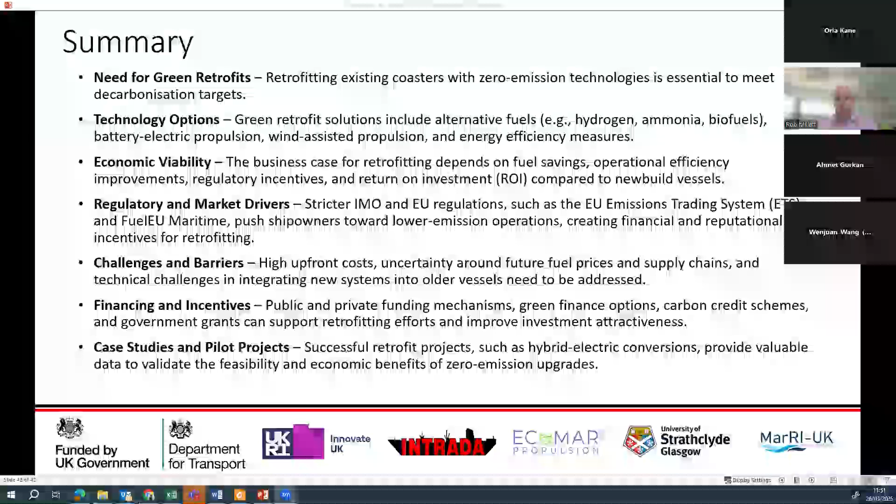I think the next stage here, which there's maybe a question about, is running a pilot project or demonstration of this would be the next obvious step. That's the last slide of what I'm going to say, so I think what we'll do is go to the questions.

The first one I can see, I think I've just answered actually: are we only addressing methanol fuel cells? We aren't only considering methanol fuel cells.

Actually, the solution that Eugene spoke about is methanol blended in the main engine, so modifications to the existing main engine. The methanol fuel cell was considered, and could give us savings of around 95% of emissions, but the capex starts taking that wildly away from feasible. So looking at methanol reformers was one of the key things we found. Given the size of the main driver on this target vessel, the reformers were going to cost in the region of €2 million, an additional €2 million on cost just for the reformers, before the fuel cell and all the other modifications. So what we've tried to do here is pick a pragmatic line down the middle of what is currently available and what would be the most economic proposal for an owner. Hopefully that answers the question.

Which is the expected uncertainty on the estimations for the gate rudder? Ahmet, I wonder if you could come back in and discuss that, please.

Okay, I don't know if it's a question or a statement. Maybe Professor Atlar, you may handle that. Thank you, and I will handle that. I noticed that the question came from my colleague, Professor Theotokatos, who is also a project partner, and he could have asked me directly during the project. Moving away from the philosophical side, it's a good question, and there are actually differences between what we predict in the CFD, as well as the model scale and the full scale.